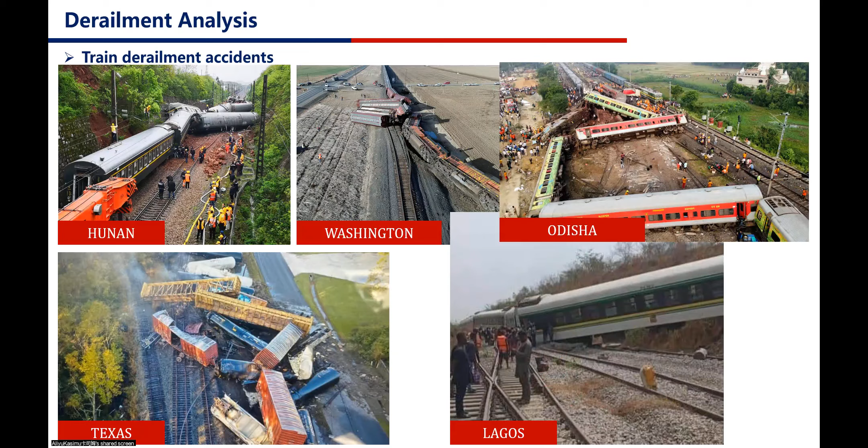Briefly, I'm going to talk about the mechanism of railway derailment. The most common method for derailment analysis is the EN 14363 standard. It says that, number one, if you want to do a derailment analysis of any train, the vehicle speed must be less than 10 kilometers per hour.

That means you have a quasi-static run, and the curve radius on which the train must run is 150 meters. So to look at the derailment coefficient, or safety coefficient, you look at the ratio between the lateral force Y and the vertical force Q. That ratio gives you a sense of what is happening in terms of the interaction between the wheel and the rail.

Let me briefly explain the mechanism behind derailment. Imagine that this force is very great, greater than Q - then this part of the wheel is basically going to climb, to climb the rail. This is the wheel and this is the rail. So if you have a very great force in this direction, the wheel is just going to climb over the rail and then get out of it.

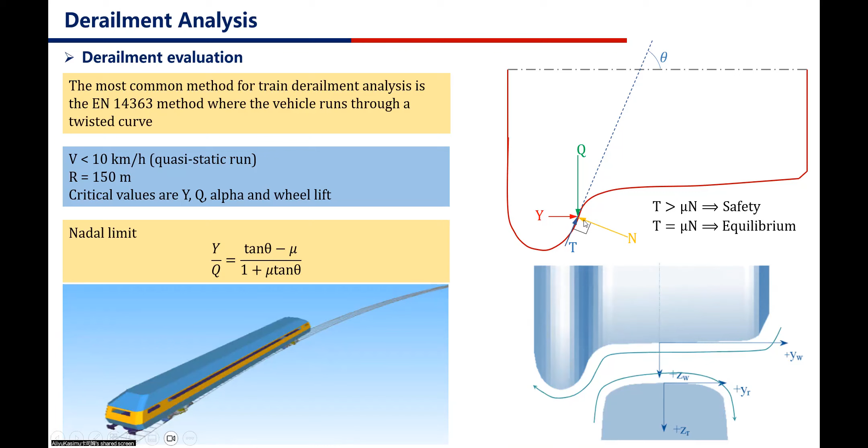What are some of the factors that can make the lateral force Y become very large, causing derailment? For example, crosswind - a crosswind will affect the lateral component of force on the car body, whether it's a passenger or freight car. Once there's a disequilibrium, then you basically have a derailment.

The second part of this is comfort analysis. I'm going to do this presentation in the context of a presentation I gave last year at the Auto EI, on coupled rigid-flexible multibody dynamics analysis of railway passenger ride comfort.

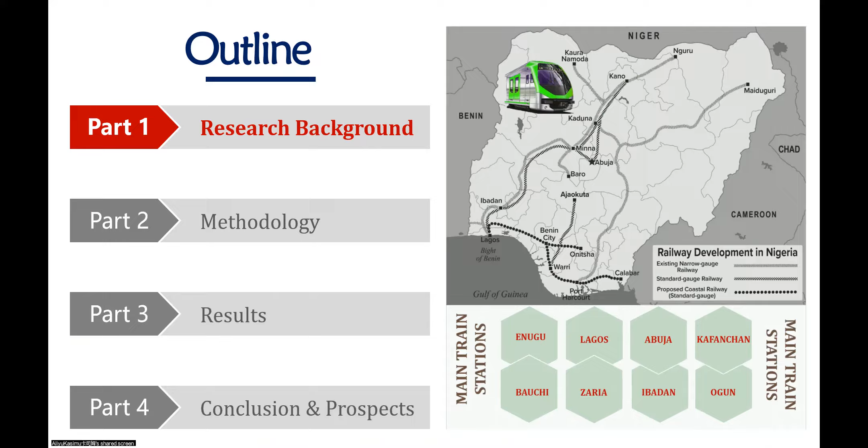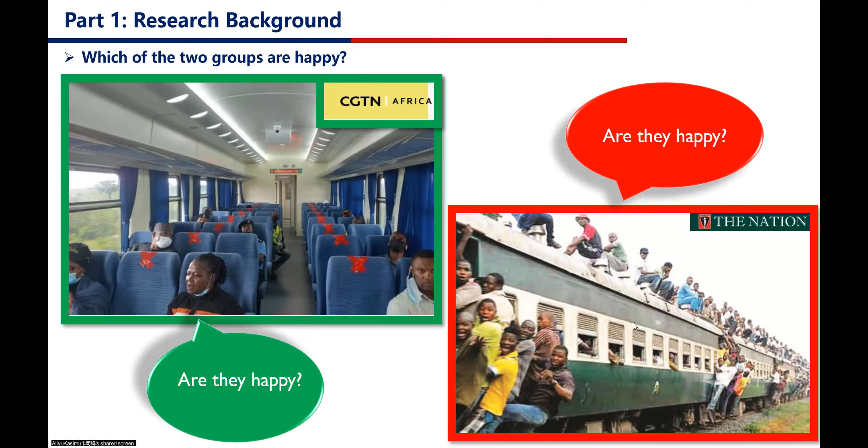So let's dive into this and look at what makes more sense, objectively speaking. What are the health effects of mechanical vibration in humans? First of all, the vibration comes from the interaction between the wheels and the rails. What is the basic effect?

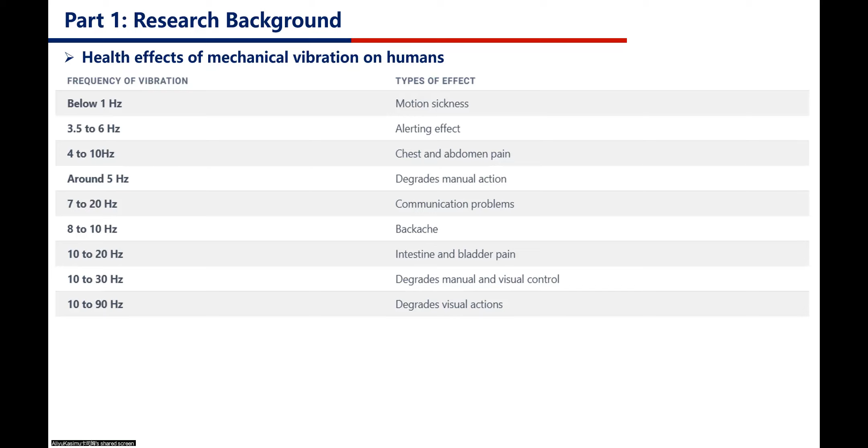From the perspective of the passenger, below 1 hertz - actually around 0.1 to 1 hertz - you have motion sickness. Above 1 hertz but less than 6 hertz, you have alerting effects. There's a range where you have chest and abdomen pain. And up to 90 hertz, you have degradation - it can cause degradation in visual actions.

So what is the methodology for this presentation? Before I dive in, I'd like to introduce you to the sense of orientation as far as railway is concerned. The direction of the running of the train is known as longitudinal direction. The direction along the track gauge or track width is called the lateral direction, and the direction along gravity, up or down, is called the vertical direction.

Now, if the vehicle rotates about the vertical direction, that's the yaw. If it rotates about the lateral direction, that's the pitch. If it rotates along the longitudinal direction, we call it the roll. Now, all these motions are possible within some range of magnitudes.

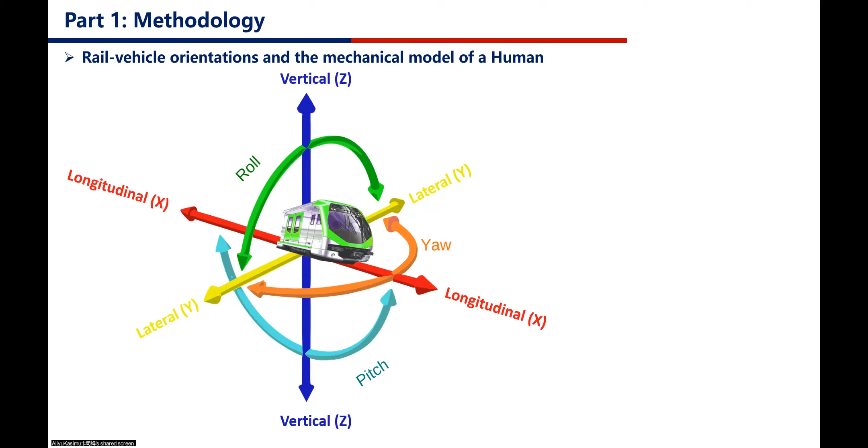This mechanical human ride comfort model gives you a mechanical model that shows the frequencies at which different components of the human body resonate to mechanical vibration frequencies that come from the interaction between the wheel and the rail. So it gives you a sense of what happens.

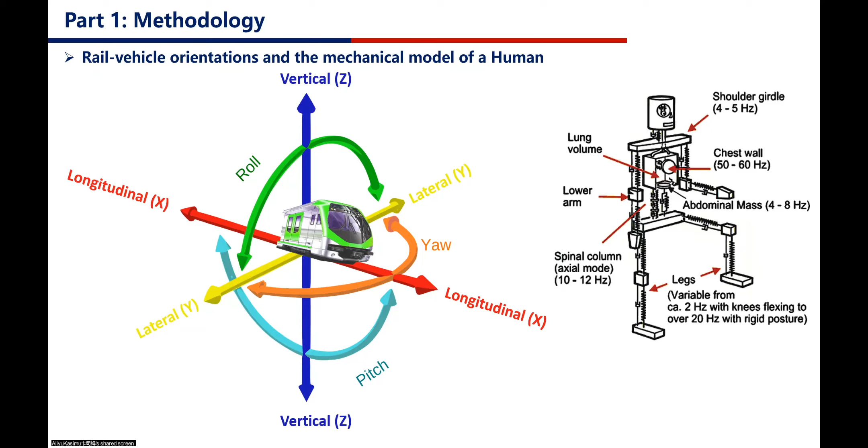So if you take, for example, the shoulder girdle - if mechanical vibration around 4 to 5 hertz is transmitted to the human, the most sensitive or critical component that will feel that is the shoulder girdle. It's the same thing for all the other components. For whole body vibration, WBV, the range of frequencies where discomfort or comfort happens is between 0 and 1 hertz and up to 100 hertz.

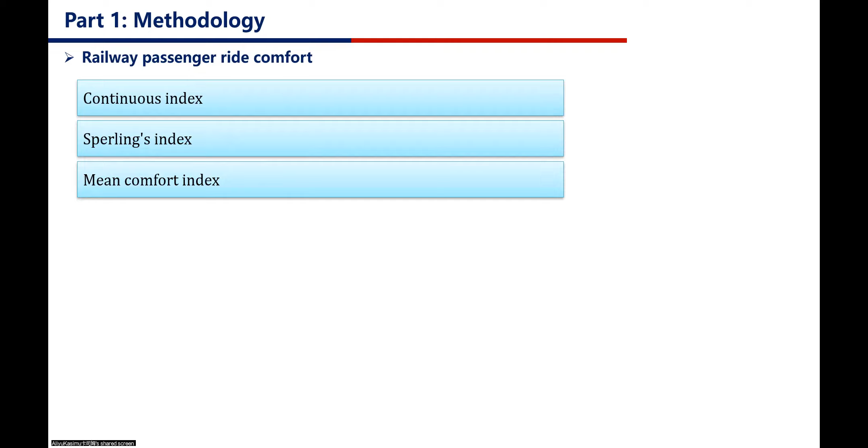Traditionally, railway passenger ride comfort is analyzed using 3 methods: the continuous index, the Sperling index, and the mean comfort index. I've given a workflow around most of them. The first step is you obtain acceleration data. For the continuous index and Sperling index, and even sometimes according to literature the mean comfort index, you collect acceleration data from the floor, a position on the floor of the car body under the passenger seat.

Especially for the Sperling index, which is mostly used in China, as an overall mechanical vibration index for the car body, you install a 3 dimensional acceleration sensor on the car body, which measures in X, Y, and Z, as we've just explained previously.

So after you obtain the acceleration data, you apply a low pass filter, 0 to 100 hertz, and then you digitize it. Digitization means that when you look at the time history of this acceleration data, you divide it into blocks of 5 seconds or more, depending on the rules of the method you're using.

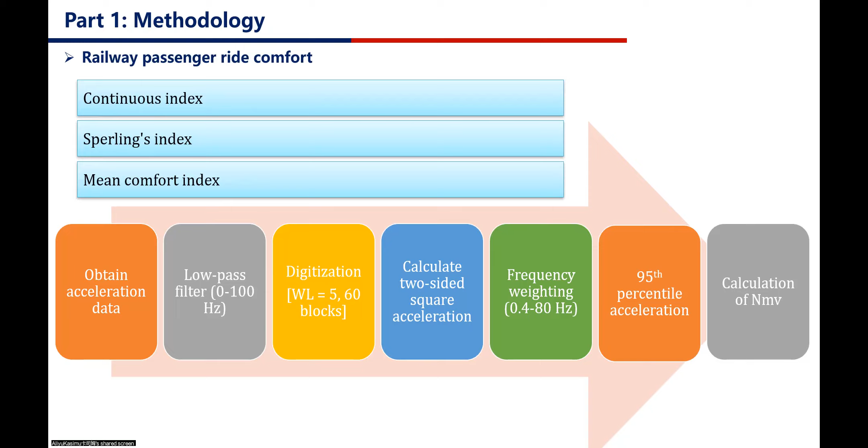In terms of mean comfort index, you use the NMV rule. The continuous index is actually used sometimes for the evaluation of comfort in curves, considering the centrifugal acceleration that occurs on curves. So these are basically the equations that go into that.

For every interval you create a 5 second window, and then you digitize the acceleration time history based on that. So at the end, if the resultant acceleration is less than 0.2, then we say that the passenger ride comfort is very comfortable.

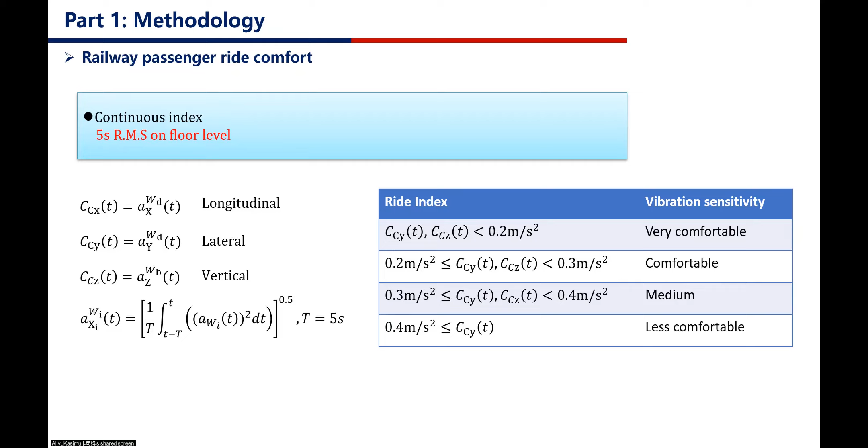So it's very comfortable for the passengers. If it's greater than 0.2 but less than 0.3, then it's comfortable. If it's less than 0.4 but greater than 0.3, then it's medium. And if it is greater than 0.4 meters per second squared, then it is less comfortable, and you need to do maintenance and look at the issues for the reasons why passengers feel a significant amount of discomfort in their ride when riding the train.

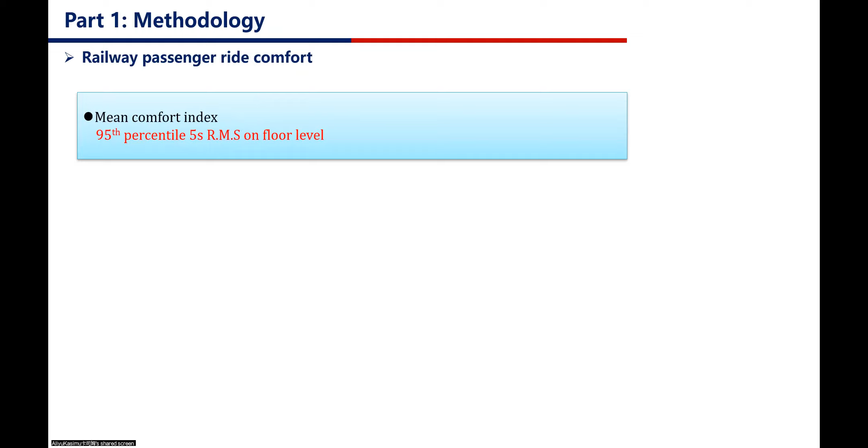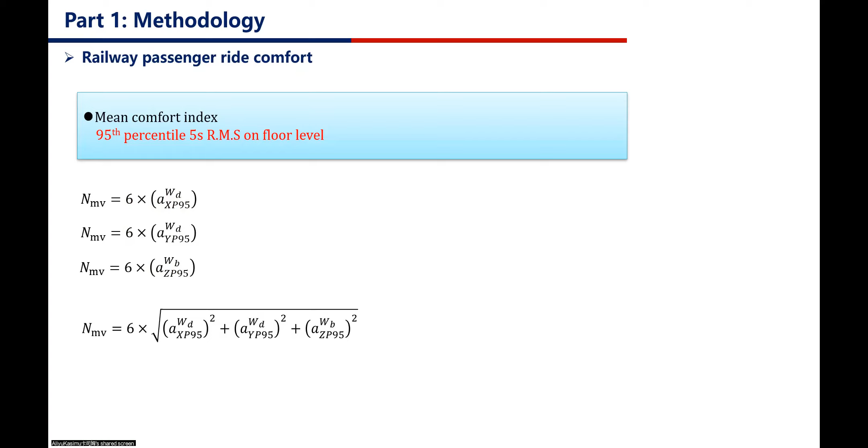The mean comfort index, as we just explained, is the 95 percentile of the 5 second RMS on floor level. So you basically get the discomfort levels in all the directions - this is for X direction, this is for Y direction, this is for Z direction. You square them, take the square root and multiply by 6. You have the overall comfort levels for that particular train and for that particular point or location where you installed the acceleration sensor.

So when the overall comfort level is less than 1.5, it's very comfortable. If it's greater than 1.5 but less than 2.5, it's comfortable. If it's greater than 2.5 but less than 3.5, it's medium. And if it's greater than 3.5 but less than 4.5, it's uncomfortable. But if it's a level above 4.5, then we say it's very uncomfortable, and this means that the railway industry must urgently look at the issues.

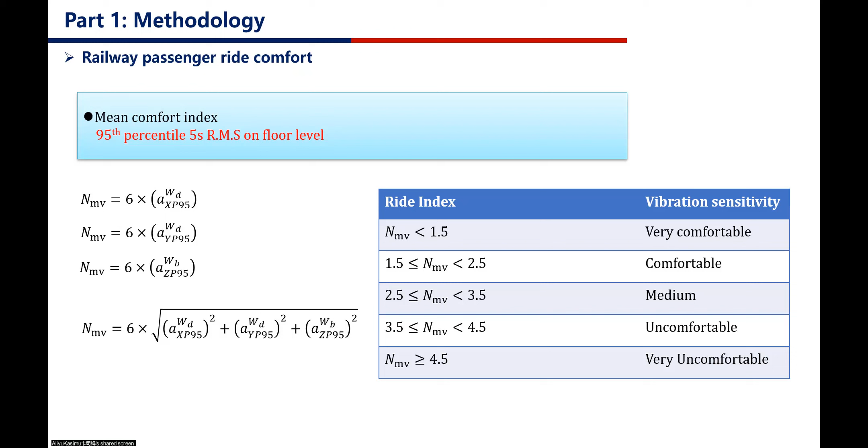So the assumption usually made when using the multi-body dynamics approach to evaluate passenger comfort is that the car body is rigid. If it's rigid, then it has 6 degrees of freedom. However, we know that although the deformations for such large components like the car body might be low or small, they are still deformations, right? So what if we consider the deformation?

What if we consider the deformation? Instead of considering it as a rigid body that has only 6 degrees of freedom, how about we consider it as having more degrees of freedom? And when we do that, what are the effects on the evaluation of comfort?

So first, to make the car body flexible, you do a structural mesh. After that, you denote the interface points, attach the couplings, and run the Craig-Bampton reduction on that. You retain the critical degrees of freedom at those interface points, retain the respective nodes, and then convert that file into an FBI generation, an FBI file, which will work in SIMPACK from Abaqus, for example.

And then it becomes a flexible body in SIMPACK that you can use to replace the hitherto utilized rigid body model. From there it becomes a SIMPACK system model that you can run simulations on, virtual prototyping simulations, and get results. Usually we use Hypermesh or Abaqus, and you can use other tools also like ANSYS to do the flexibility modeling.

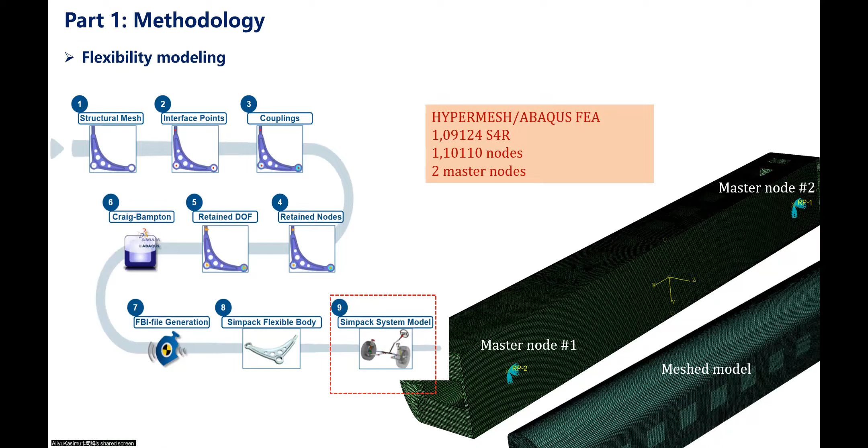So the results. Before we talk about the results, let me talk about the locations where we tested the discomfort levels for this virtual prototyping simulation. We put one here, one in front, one in the middle, and one at the rear.

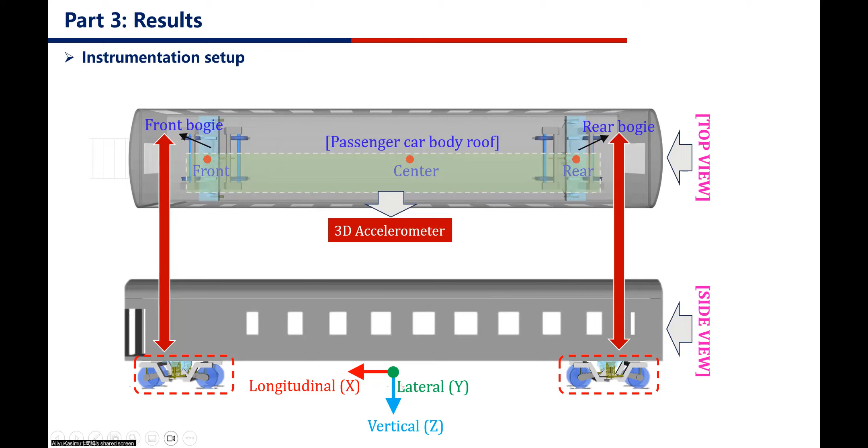And then you can see that it is a 3D accelerometer that we used for each of those locations.

So basically, you are saying it's a linear relationship, right? If you increase the vehicle speed without touching any other thing, without improving the suspension systems, without putting any new suspensions on the passenger seats, if you leave everything as it is, and the only variable you vary is the speed, then this is the result you have. The more you increase the speed, the discomfort levels grow up also. So if there is an increase in vehicle speed, then generally there will be an increase in passenger discomfort.

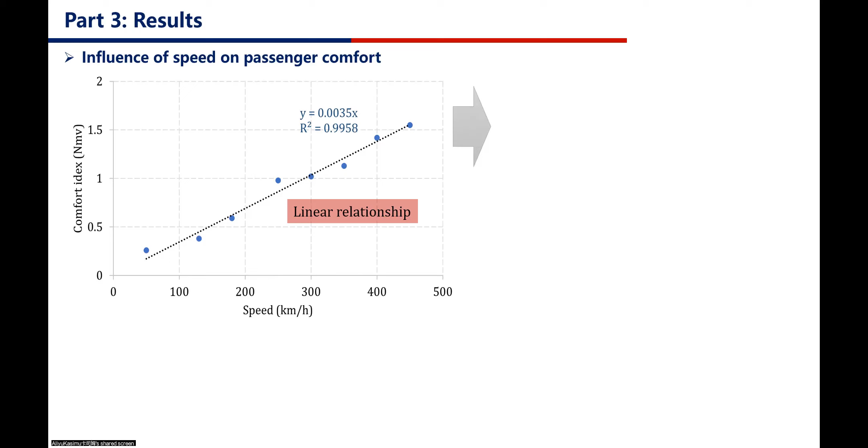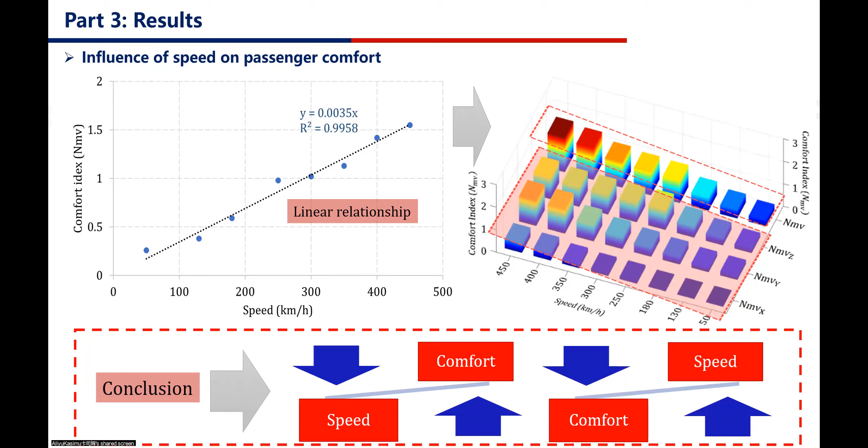But there's something also you may want to note: the discomfort in the vertical direction is more pronounced, and this is proven from other literature also. So we can conclude from these two charts that when you decrease speed, then you can increase comfort. And when you increase speed, then you decrease comfort directly or indirectly.

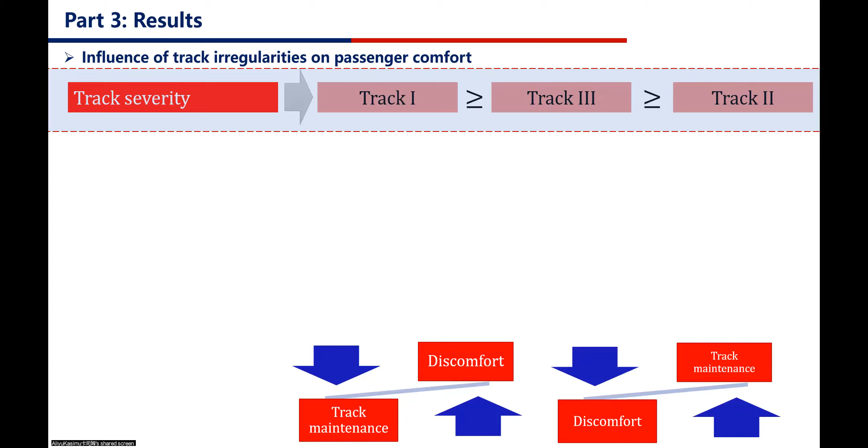Track severity. I want to also consider the effect, or the influence, of track irregularities on passenger comfort. The greater the severity of the track irregularities you have, then the more vibrations you're going to have in the wheel-rail interface. If you have more mechanical vibration in the wheel-rail interface, then you are going to have greater magnitudes of mechanical vibration that is transmitted to passengers that are on board the car.

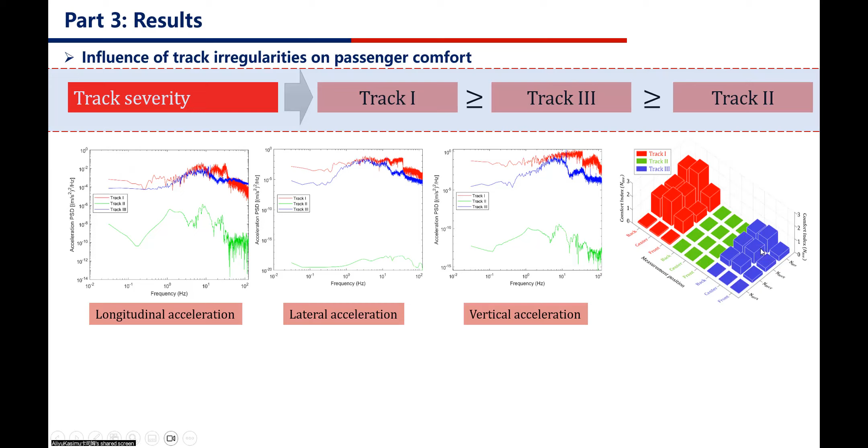They are the worst, and the green one is an ideal situation where you have no irregularities, meaning you have a perfect track surface. So when I simulated this, you can see that directly, the relationship is very direct. You have high discomfort for the tracks that have very severe irregularities. You also have they're the severest here, so they cause the greatest magnitude of discomfort.

So what does this tell you? It tells you very directly that when you are prudent, and focused on track maintenance, then you will have better outcomes. If you are not focused on track maintenance, if you don't do track maintenance, then you're going to have very high levels of track discomfort. While if you do your track maintenance very well, then discomfort of passengers will go down. So I think that directly what we are talking about is the maintenance operations that we usually do for tracks and wheels, right?

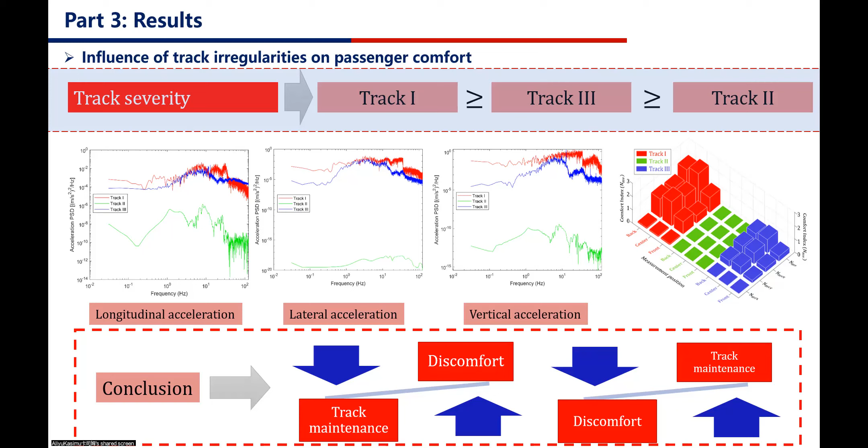For example, grinding the track. If you grind and the track moves closer to an ideal perfect surface track, then you're going to have higher levels of comfort for passengers.

So now, all what we've talked about is based on the rigid consideration, where we're considering the car as a rigid body. How about considering it as a flexible body?

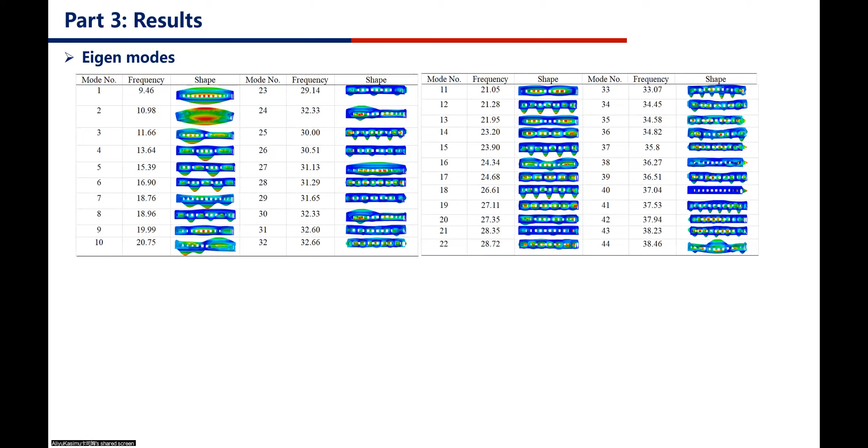So these are the eigenvectors. Basically, at every frequency, this is the mode shape of the car. You can see that the minimum is 9.46 and the maximum is 38.46 hertz.

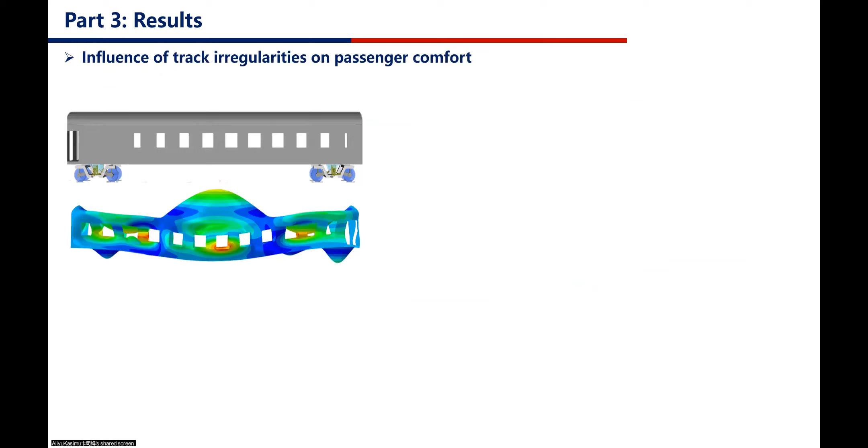When you compare the rigid and the flexible body, you'll see that they're very similar.

Although, if you pick the flexible situation as the standard, then you can conclude that the rigid body consideration overemphasizes the ride comfort.

However, if you pick the rigid consideration as the standard, then you can conclude that the flexible situation underemphasizes ride comfort. But the critical point here is that the values are very close.

That means there is negligible influence of considering the car body as a deformable body with elasticity, as far as the evaluation of comfort is concerned.

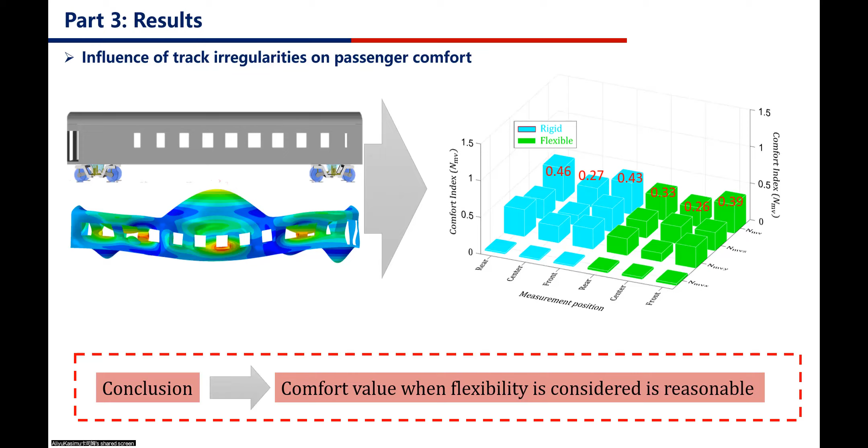So we can conclude that the comfort value when flexibility is considered is reasonable. That means they are very close. So for my conclusions...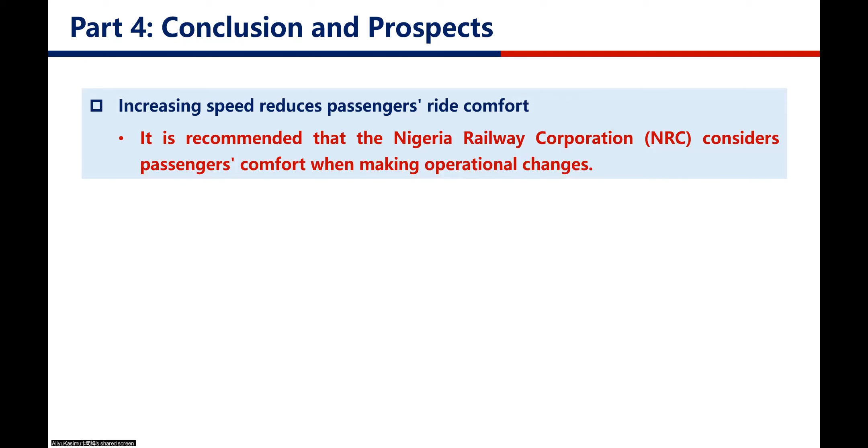You see very immediately that increasing speed reduces passenger ride comfort. Bad track maintenance culture reduces passenger ride comfort. Also, car body flexibility has significant effects on passenger ride comfort.

That is, if you consider it as a standard and compare. But overall, the values, or the range of values, are within the same brackets, or the same comfort index category. So that means ride comfort does not become uncomfortable just because you make the car body elastic.

The last conclusion is that skilled locomotive engineering researchers can be drafted into research units within NRC or any other railway industry to study the effect of changes in vehicle or track operations policy, so that when policymakers make policies like increasing the train running speed, a research unit can advise them competently, and they might want to think twice about some of these policies.